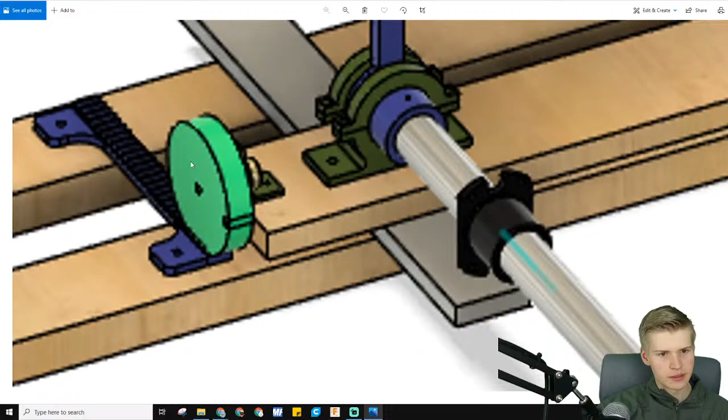You see this right here? This is a potentiometer. We don't like those, apparently. Everyone I talk to says potentiometers are the devil - they're so inaccurate, you should get Hall effect sensors. So I'm thinking about changing back to those, and I think that might be a little more fun.

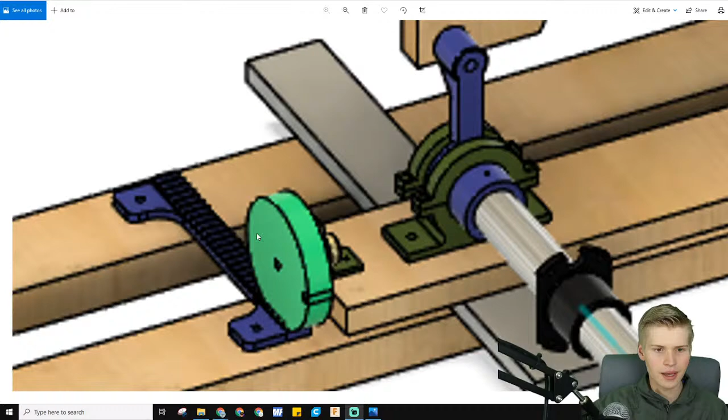Let's hop back to the chat. And here we are. Let's see. So the yokes, as I've shown you, we can hop back to scene 2. Basically I'm going to show you this all in the yoke video, so if you want to be surprised, close your ears - plug your ears, I guess.

The yoke goes forward. I updated this funky rack and pinion thing for a less funky rack and pinion setup. Now I'm just working on strengthening the weak parts and going for that - that's also how I do my workouts, strengthening the weak parts, I don't know. But yeah, that's most of it for the yoke.

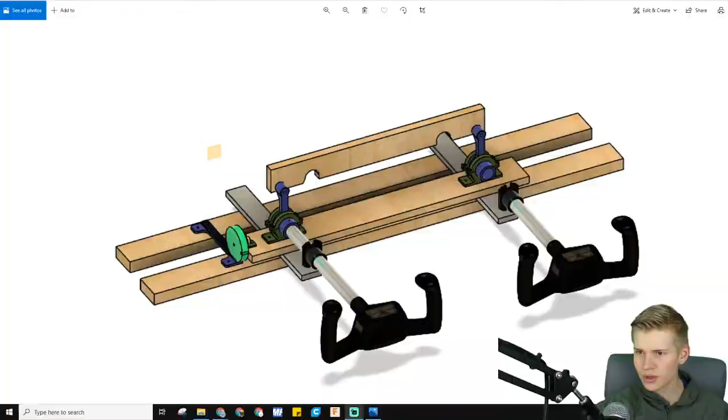I am going to show you some CAD later, or I guess right now. Let's do that - Fusion 360.

Alrighty, so I also do want to bring up the topic this whole video is about. All right, I have Christmas music pulled up. I love Christmas music, let me see.

Uh-oh, it looks like it's frozen. But we'll pretend it's not. Uh-oh, that's not good. All right, how are we doing online? Can you see me? Can you hear me? I was getting so motivational. Darn. But yeah.

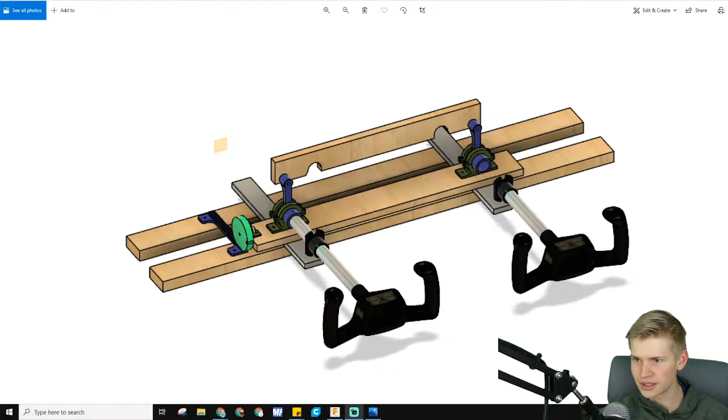All right, we're going to open Fusion 360, which is also known as Confusion 360. Let me, I think I have a thing, CAD, where is it? Boom, boom, it's like this.

All right, we're gonna let Fusion 360 load up, and then I'll share my screen, because that is an important part of computer-aided design. We need a little Christmas right this very minute. Oh, where'd that go, let me bring it back. I'll share my screen in a second. I'm struggling.

Alright, so here is Confusion 360. We're going to be designing today a part of our yoke assembly. It's going into section 2, just under 2. Right now I'm trying to figure out a better way of doing this.

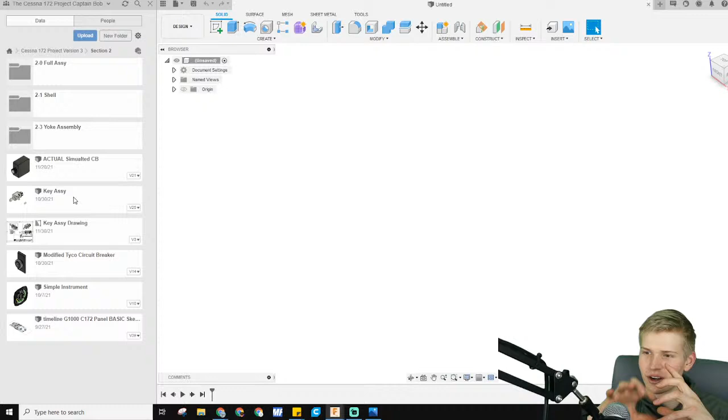Is this what you see? Let me make sure it is. Actually, I can zoom in, that makes it easier for you. I'll just zoom into the place right here and hide the Windows bar.

There we go, CAD man. I won't have holiday cheer unless I have this, so there you go. Yeah, it has to be to the side, otherwise it's not Santa, it's just a grumpy person, right?

Alright, so we are going to start our flaps module. We're going to have two pieces of hardware. One is a servo, I've already modified that in my electronics library. I'll just drag it in real quick.

So we gotta save it before we enter anything. This will be the flaps, let's just go Assy, the shortened version is much easier to type. Maybe I should go to college.

So it's going to be in Section 2. Section 2 is for everything that goes to both simulators. Section 2A is specific to the analog, Section 2G is specific to the G1000, that's how it's divided up. So Section 2, and this isn't a key, this is a flap.

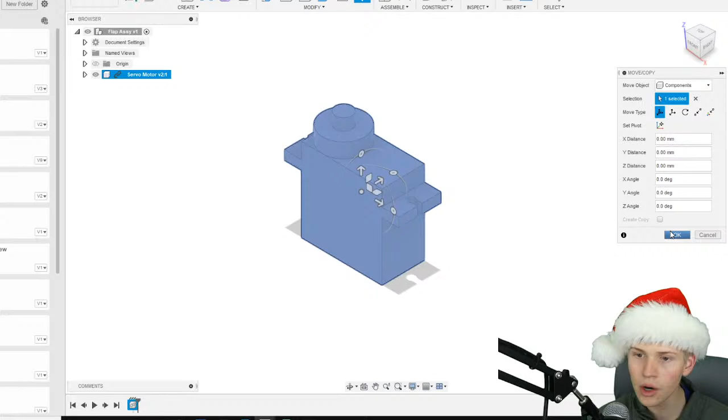I have a ton of electronic models in my library that I've been slowly growing. Here's a servo motor I CAD'd real quick. So I'm going to start out with these components because I know I need them, and they'll just be floating in space until they have a home. I'll hide them, probably. And then we have also something else.

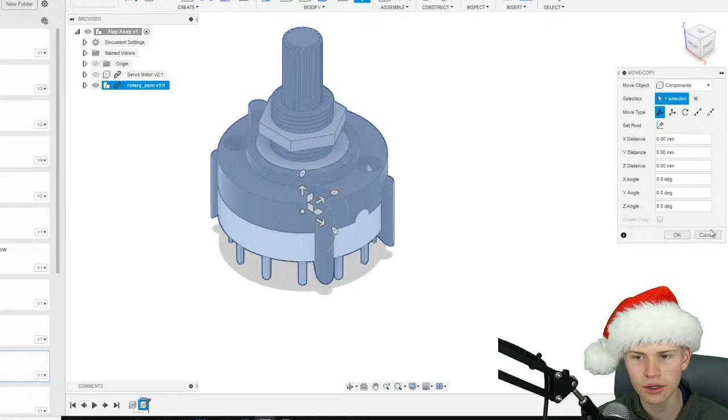Where did it go? We have a rotary thing. All right, so here's our rotary switch. I found this on GrabCAD, and I can use it to reference everything. I'm not actually going to 3D print a switch.

That would be stupid. Actually, it might work. It might be cool to, if I go super deep into everything, to have everything modeled like that. But no, I'm not going to create my own wood from trees I've chopped down. But yeah, here's your holiday cheer, so I'm not clickbaiting you.

Oh, thank you, thank you Javier. I'm really bad at pronouncing names. I hope I got that right.

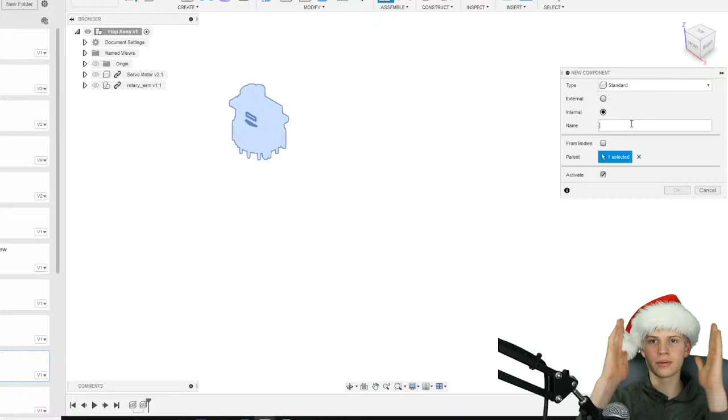I think I should start making my components right now. So this flappy thing is going to have a few components. One of them is going to be a faceplate. One is going to be a left side plate, another a right side plate, another one for the... another one is going to be the servo and the rotary assembly.

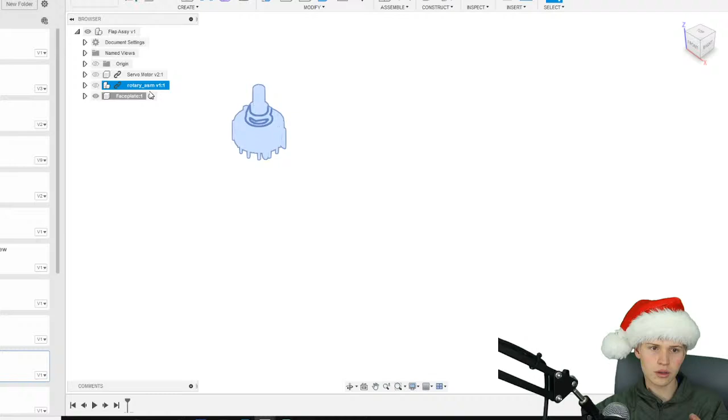So we'll need two more parts. After that, new component, we'll have it... yeah, I gotta have the hierarchy right. But we'll have a, what's it called? Left wall, we'll call it.

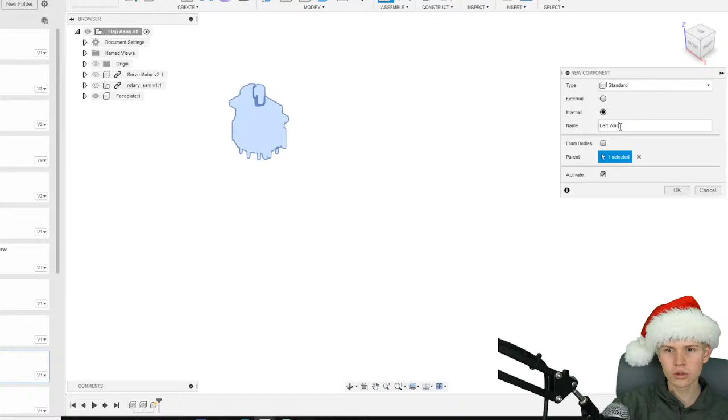I don't know, whenever I'm looking through people's CAD models I'm like, why did they call it a wall? That's dumb. And then I'm like, oh actually they called it that because they ran out of words. I run out of words too, so we're going to call them walls. They're the things that hold the electronics. There's also going to be a servo lever.

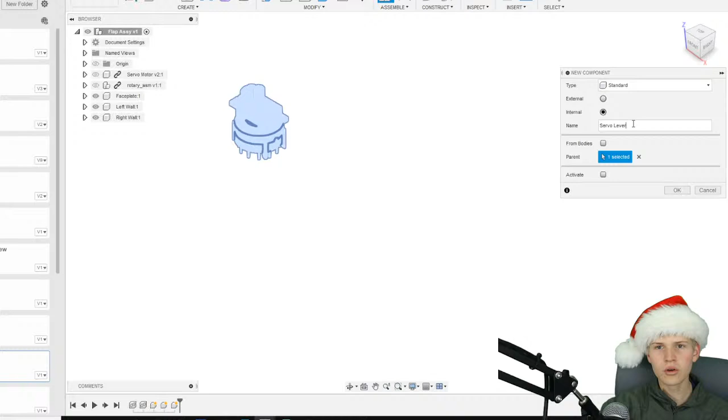Servo lever. And then actually, what might be easy, part of me is like, do I want to laser cut it? Because laser cutting, you buy a sheet, laser cut it real quick, put them together, and it's super accurate depending on your laser cutter, it's cheap, don't have to 3D print it, good DFM, design for manufacturing.

But also, at the same time, if I get a plastic part like this, I can have it as one part instead of three, and if I have one part, you don't have to assemble it. So I'm thinking maybe we have a component whose parent is this, called walls. Wally, yeah, it'll be fun.

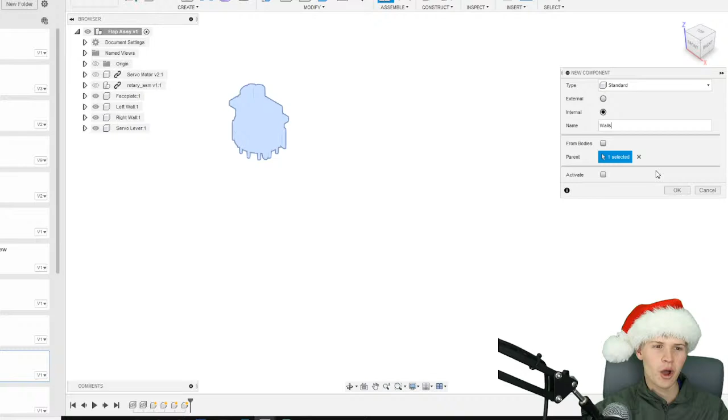We have a component called walls over here. We put the left wall in, the right wall in, and we shake it all about. So basically we have a left wall, a right wall, and a middle wall. The active component is going to have a middle wall too, and those will basically be the spacers.

So I really like allanglen's Cessna 172 flap control. I'm going to design it to my own specifications. I'm very particular about hole spacing and stuff like that, but if we go to its Thingiverse, we can find it.

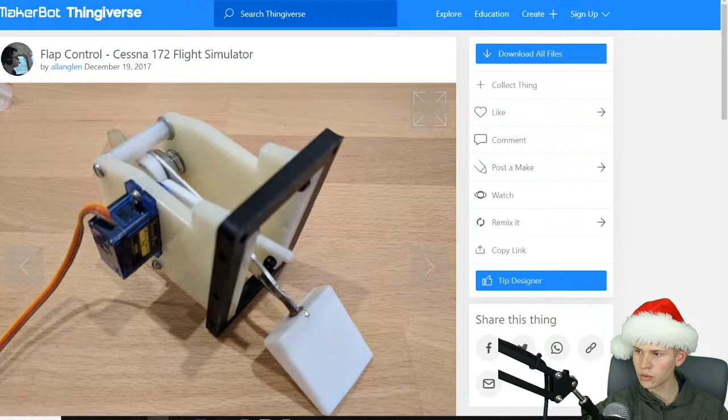Oh, it's like we can find this design. So I'm going to have the servo lever, kind of like he did. He used an actual Cessna 172's control arm right here. I don't want to do that, because then everyone has to buy a Cessna 172 control arm. And if I make everyone do that, we'll run out and the world will collapse upon us. So it's just not a good idea.

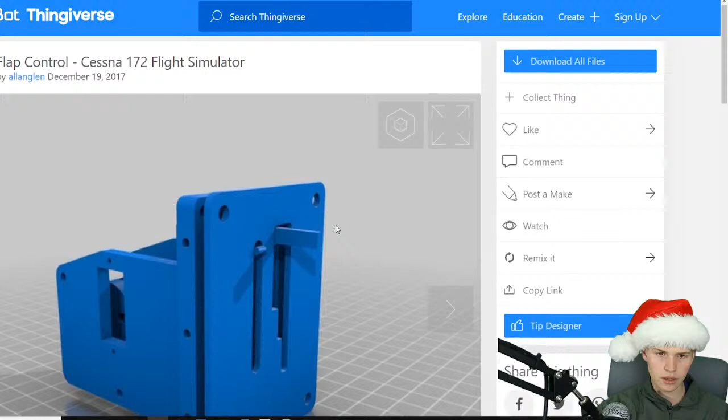I'm thinking I want this. Basically he has a lot of it. It's weird though, because he provided this CAD model with everything sketched out and stuff, but then it's not actually all in the file, so it's a little weird. You'd have to cut it up. But basically, I want to improve upon the arm mechanism and make it so it's primarily 3D printed instead of...

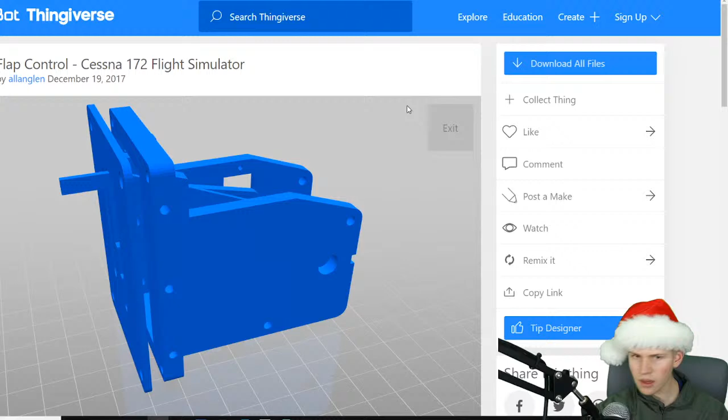It does show the lever. Let me see, that's strange. It must be on the site. Let me go get that. Can you properly? Huh, let me see.

So it's possible I'll use this one. I do like designing stuff, like it's a challenge for me to think about how to design it. And I do want to have it all one part right here, so you can just print one part, no supports. And then out of the gate, it's like a 2-part assembly.

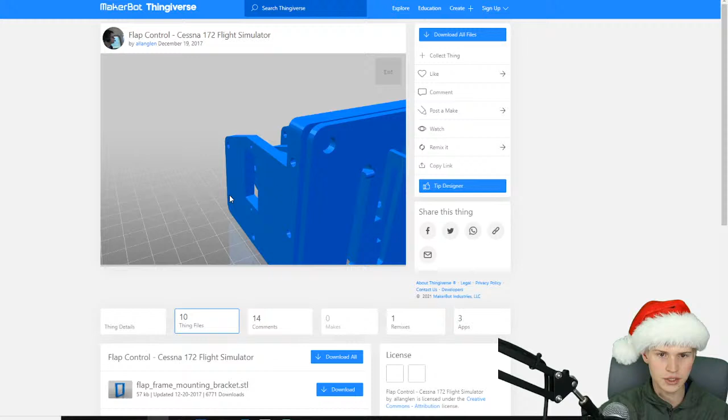So it's easy, or I could have a 3-part assembly, so it's easy to ship, with walls and spacers and stuff. I definitely want to see how I can do that. I do want it to be flatter though, it's a little tricky. I like this design a lot. I just like pushing the boundaries a little, even if it doesn't accomplish anything.

Let's see, he does show the 3D printed lever on his site. I just printed it. I'm gonna go back to his site. allanglen, here we go. So let's go, I think it's under avionics stack. Alrighty, so it looks like he has this part, this part, this part, the lever mount.

Oh, it's glitching out again, my apologies. Huh, okay, so that's really weird. So I know he has this part. I couldn't see the actual lever that the handle goes onto anywhere. So I'm gonna look, because there are 2 knobs. One of them's a lever, and one of them's something else.

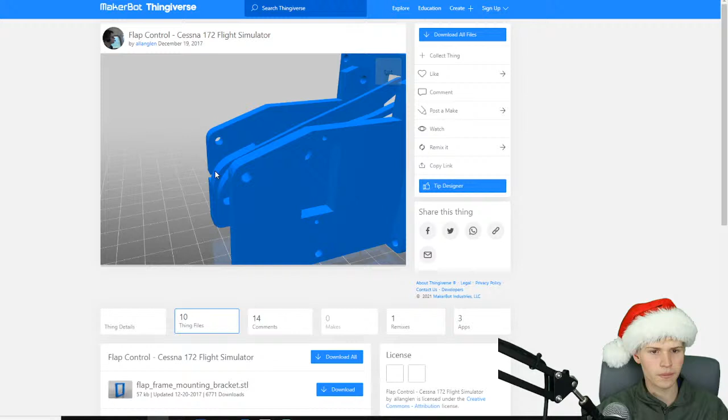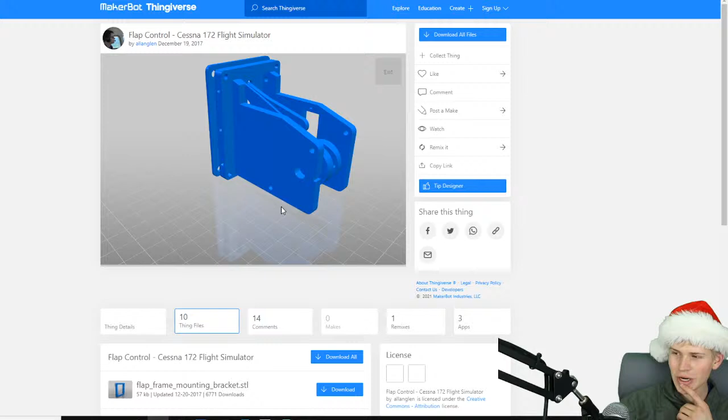I'm gonna see 6 pieces. 1, 2, 3, 4, 5, 6. Alright, yeah it's weird. It looks like it's in this FreeCAD file. So I think I could just basically open up the FreeCAD file and print it from there. But this is one of the designs I've been looking at. I'm gonna try to make back up to it, I can't find it anywhere.

This one isn't the right one. Yeah. Oh, here it is, there's a mount for it or something. Pointer and lever, pointer and lever. I'll just control-F it. Never mind, alright, so I can't find it.

So I'm basically going to - I could take this design and go from there. I could also make my own, and I think I like to make my own a lot, it's just fun to build them myself. So what I did was I have a folder in my Cessna 172 simulator folder. I'm gonna probably end up putting this on GitHub someday. Where did it go?

Section 2, flaps, I have so many images. So I have this whole folder right here. I go on eBay basically, and I find a flaps panel, and then I basically replicate it. So there are a bunch of different styles of flap panels, short ones, thin ones, fat ones. Here's the lever assembly that we're talking about.

I couldn't find it, I'm probably looking in the wrong places. Here's the handle, some good reference images. I'm gonna throw that one - oh, we'll rename it something, put a 1 at the end of it, and then it's different. So we have all of these handle images from eBay.

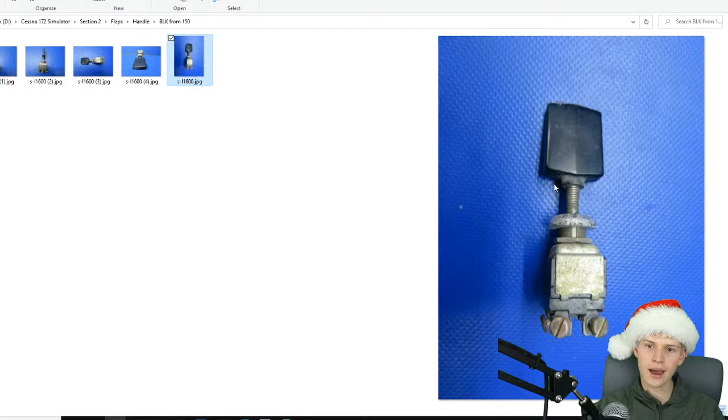And so I basically take these and go from there and challenge my brain, because really, just like when you're learning CAD, if you're wanting to learn more CAD, you can copy people's designs and put your own spunk on them. Like, I really want to have this root right here, this extrusion. I don't think his simulator had it on his flap handle. Where is it? Exit. His flap handle right here doesn't have that little thing. I think it might be a 3D printing, make-it-easier thing, but I think I just want to print it with support.

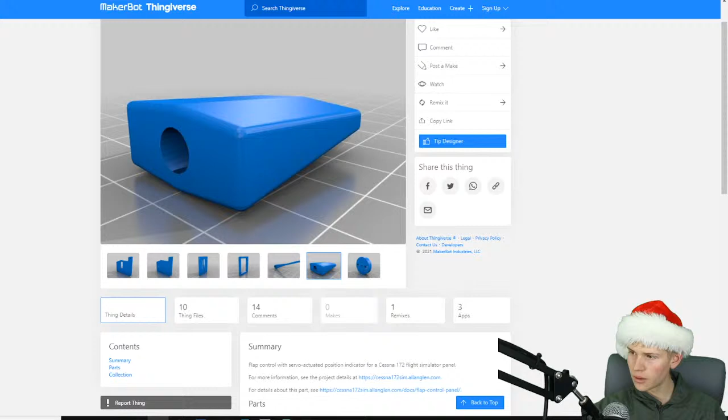Right, so yeah, here's what we are doing. This is someone else's thing. I want to kind of take inspiration from it, make my own, and I'm gonna just basically start from scratch. I want it to be as few parts as possible, so that'll be interesting. Let's see.

I want to see. Oh, is there humming in the background? We'll figure it out.

Alright, oh that's too bad, your joystick broke. Sad to see it here.

Alright, I'm gonna just read through the comments real quickly. Interesting, I'll have to look harder for it.

Can you properly laser engrave PLA? Probably not very much. I'm gonna look into some thin sheets of ABS. Not ABS, acrylic. I just printed the whole assembly, 6 pieces to it.

Back up to it, point and lever. Alright, I'll look harder later. I tried printing this a while ago, but I had the same problem.

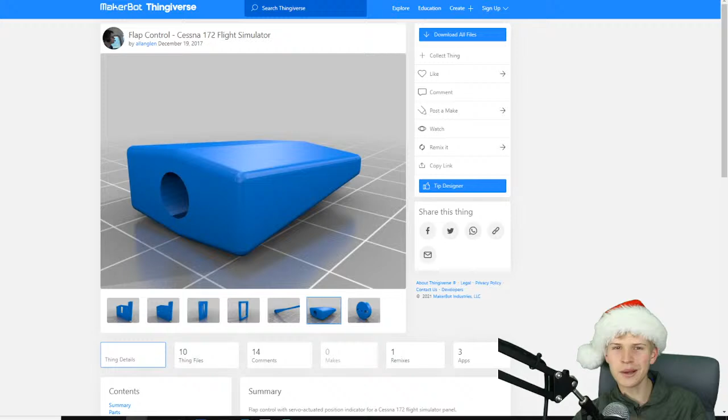Position indicator. That's so weird. This is the flap position indicator, but I don't have the actual real one. So there's also this lever mount, but I don't have this metal piece, so I'd have to probably buy one, I think. Also, his design uses a potentiometer.

These are notoriously hard for me to explain to people how to connect them. They're probably pretty easy, but I just haven't. The easiest way to do it is to connect it to a joystick and then coordinate the joystick, like find a way to calibrate the joystick to the flap axes and make sure everything is good to go.

I'm going to use a 4-position switch. That might be easier. I know in these, I feel like it's more of a smooth movement instead of a definite pop. So the detents in the switch will kind of maybe throw it off. So I might try to make a design with both a potentiometer, a flap, and a rotary switch.

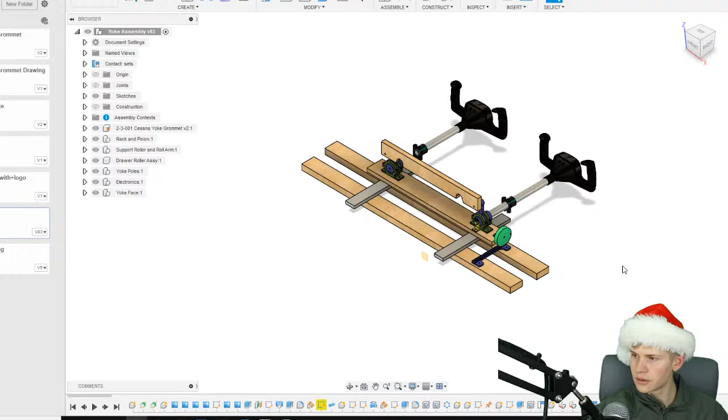I'm gonna look one more time because I really don't see it. Maybe this is taking too much time. Yeah, I'll look later. But here's my yoke assembly.

We don't need that right now. We want this flaps assembly. Very nice, so it looks like he does have it up there. I just skimmed it and missed it. I've missed it my whole life.

Alright, so what I'm thinking is we could make a left wall, a right wall, and a middle wall. And if you want to have it laser engraved, you'd just have a left wall and a right wall. And then you'd use spacers to go between the two. So that is one way of doing it.

I might also instead kind of reference geometry from some of this stuff and say we have the left wall and the right wall, and then from there we have three parts. Just basically have one part that's designed for 3D printing, one part that's designed for laser engraving, so that it keeps both sides of people happy. So yeah.

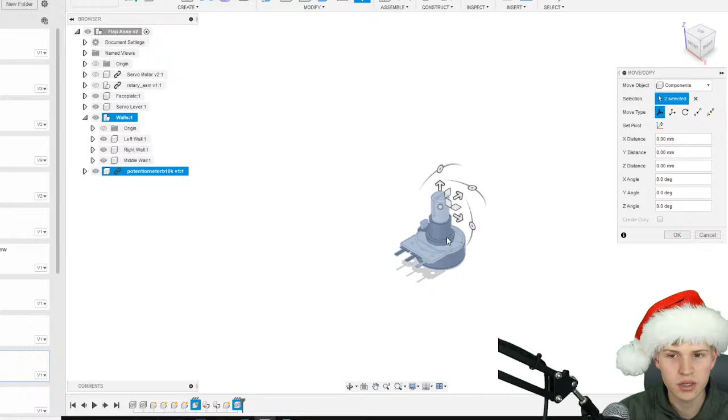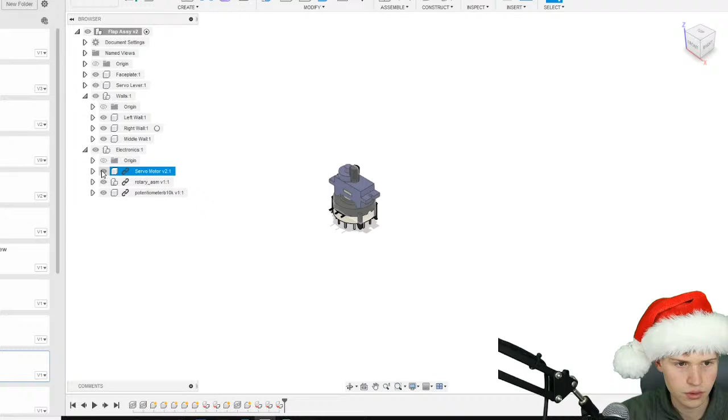So we also have a potentiometer. I'll make an assembly, kind of like I did with the walls, hopefully at the right scale. I'm going to make a new component called electronics, so I can put all this stuff in there without cluttering up my file tree. The nice thing is we can turn them all off and on at once, like an avionics master switch.

So I'm considering FSUIPC. MobiFlight is a little trickier, I have to do some fancy stuff. And welcome, Noah, welcome to the stream, glad you could make it. It'll be fun to see when it's done.

Detentless encoder? I've never heard of that. Is it just an endless encoder? Huh.

Strange. Also, why did my thing turn to Bing? No one likes Bing, just kidding. But I like Google Chrome because it shows you videos usually. That's just a side tangent.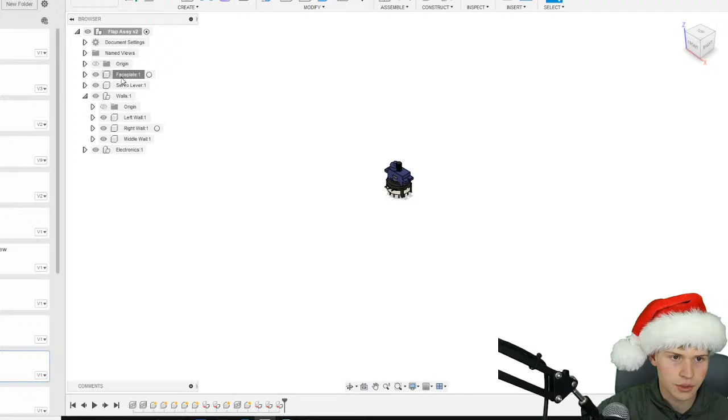So we have the electronics we're going to design around. We're going to start by doing the faceplate. The faceplate is the keystone of this design - if I get the faceplate wrong, it'll be a little tricky.

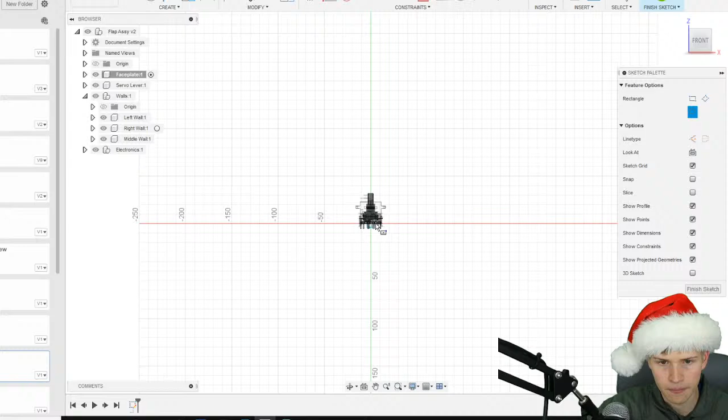So now we have a sketch. We want the front to be right here, and we're going to make a centered rectangle. I'm going to turn off the electronics, and for now I'll dimension it later.

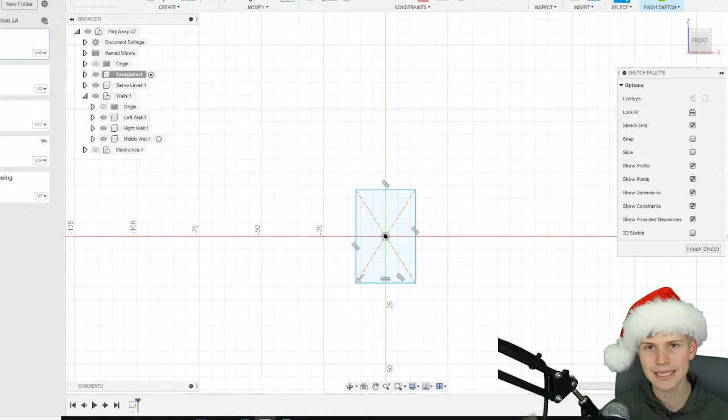Over here, we're going to pull in something. So I have my old files - those are the good days - but here's the new files. Section 2A is my work so far, so I'm going to pull in the panel. Section 2A and Section 2B will be the same, but I've only modeled Section 2A.

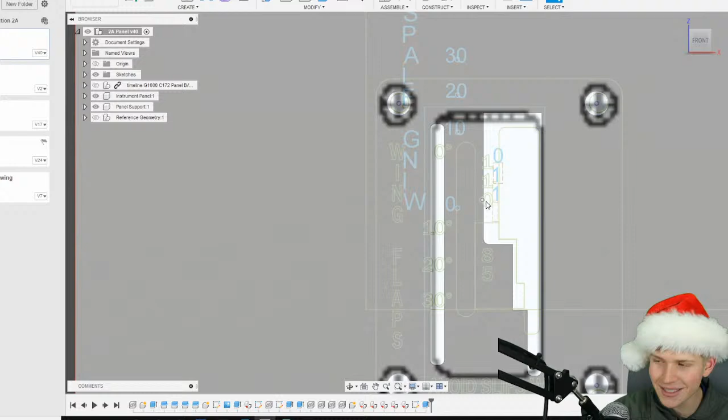I also wanted to see how he did it, so a lot of reverse engineering is used to forward engineer. I'm going to do all of my designs in Inkscape - I don't have Illustrator, can't do it there. But he basically just made a box with patterned holes. His didn't line up enough for my images.

So what I did after that was have a bunch of reference images just to double check - that's what all of these reference images are. I can pull them up and we can make them work.

One of my questions is there are three types of flaps, and they each have different speeds, so I need to make sure it corresponds to my simulator. I might want to make the speeds parametric, so I can change the words - I can't have an image of text, I have to have the text raw. That's another challenge. Here's what it looks like blank, and then these decals are applied - they're either decals or screen printing, I'm not quite sure.

So here's basically how it functions. There are also ones without faceplates at all. This one, for example - don't know what part of a Cessna it is - but instead of having like, I'll make a drawing.

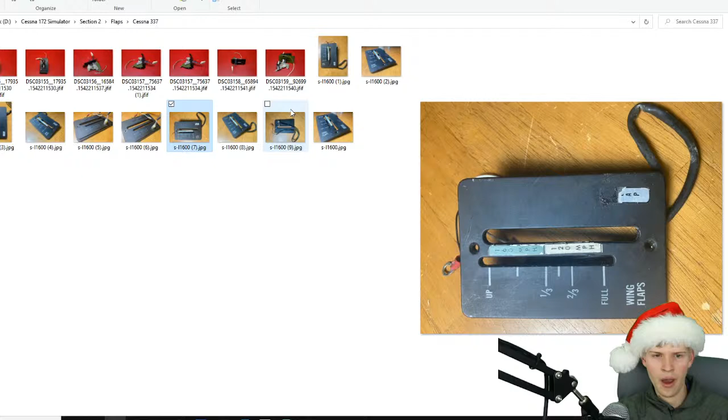Anything else? The Cessna 337 had a pretty ugly one. It looks like they photocopied it almost, which would be good for me because it'd be straight on, but it isn't. I also like how their flaps are in fractions, that's just funny. Here's the mechanism in their airplane. Not really sure how it works, to be honest.

Maybe I do. I think, actually, if it might be, there are two micro switches. I could do this in the real world with some logic programming. This is the actual flap mechanism, and this is why these designs always take more than exactly 1 hour. If I have a click one way and a click the other way, you can tell based on the amount of things it's clicking which position it's in. So if it's clicking the bottom one, I guess.

This is insane, what am I doing? I guess it's actually, let me check something. So up, down. I don't know how this mechanism works. I've gotta reverse engineer it.

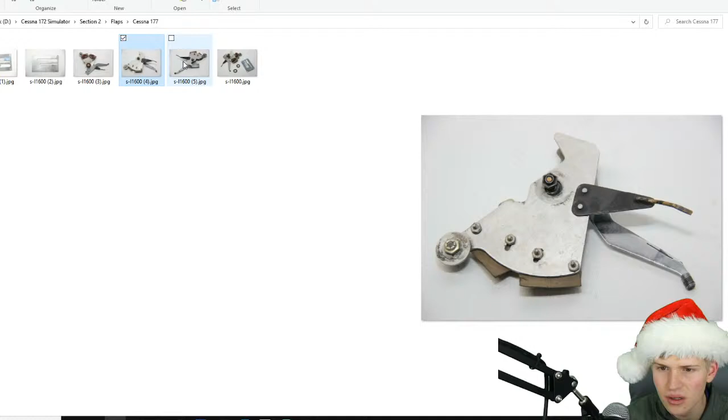But I think what happens is if this hits one of the micro switches, it knows it's in one position. If it hits none of them, it's in one position. If it hits one of them, it's in this position. And maybe even if it hits both of them, it's in one position. So it's like something, I don't know. This is strange. If anyone's a mechanic or something and knows how this works, I'd love to see how it works, or even if you take apart Cessnas for fun. I have no clue how that works, and I would love to find out.

It reminds me of the gear mechanisms that have the micro switches for up and down. I'd have to think about this because I have tons of those micro switches. You just snap some in real quick.

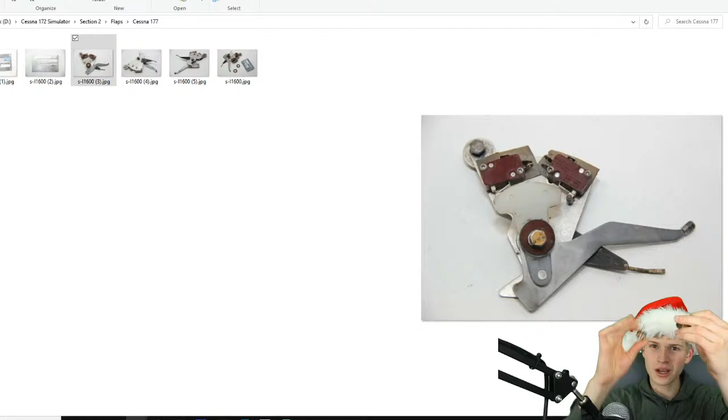Strange stuff. I guess a potentiometer would be the best free rotating, detentless switch. A rotary encoder, I was thinking about that, but it would be super tricky because you would basically have it say go down one flap, go down one flap, go down one flap, go down one flap. But the flap down commands would be so close to each other that it really wouldn't make sense with a rotary encoder. So I'm stuck with potentiometer and rotary switch for now, unless I can make my own rotary switch out of micro switches. But I think those are the main options right now.

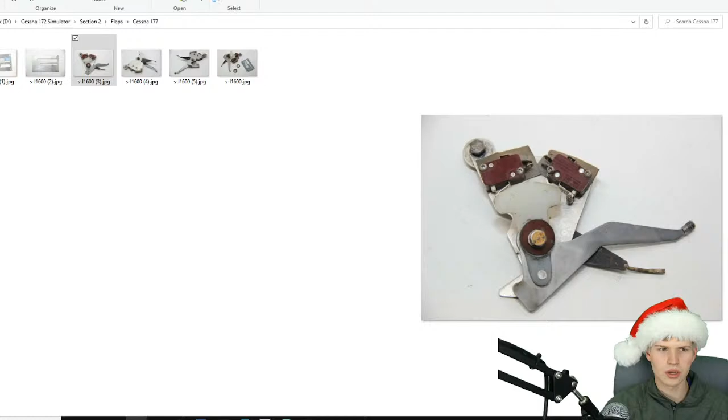How many positions does the flaps indicator have? I believe it has 4. Yeah, 1, 2, 3, 4. Used to have 40 degrees of flaps, which would have made it perfect for my 5-position switches, but those are only in pretty old 150s. Darn it.

Four positions. All right, so okay, yeah, since there are 2 bits from 2 micro switches. All right, let's go back to that image. I want to see if I can decipher it now. You've given me new powers. So it looks like there is a...

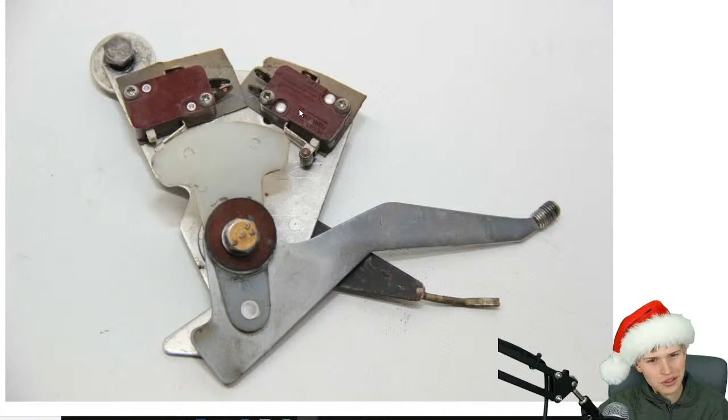I don't know how they both connect at the same time. I think that's the middle position. But it looks like this hammer thing: when it's all the way down, it hits one switch, so flaps down. When it's one from all the way down, it hits one, but not the top - it hits this micro switch, but not this micro switch. When it's here, it hits the top one but not the bottom one. And then when it's at the top, it hits none of them.

Yeah, I think that would be a cool design. So that would be a lot of possibilities. Let's see, strange. That blew my mind, thank you so much, Jay.

I might have to design one like this in the future, like after I do my simple rotary mechanism, because this is really cool. You can tell when these are on and off, sorry about the microphone, because they have a normally open and a normally closed, so it does give both open and closed information. So you could easily take that into MobiFlight and write a really ugly piece of configuration that says when the top switch is on but the bottom one isn't, do this; when the top switch is on and the bottom one is too, do this; when the top one isn't and the bottom is, like that. So that would be pretty good.

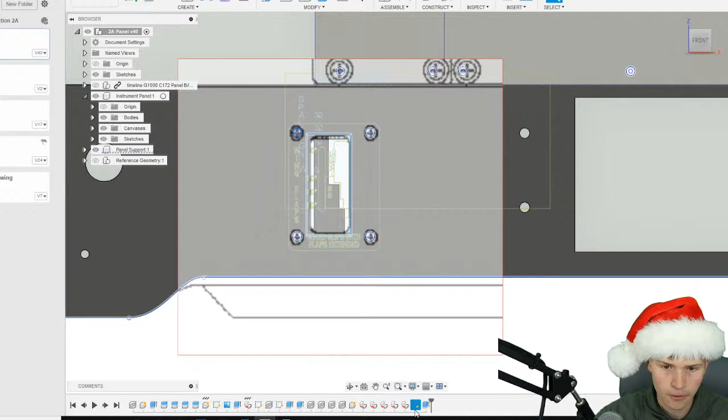If we go into this sketch, basically what we're going to do is insert a ton of canvases from my computer. Wish you could just drag them down - that would be fun, but what's the point of that? Right now I just got to choose between the flaps.

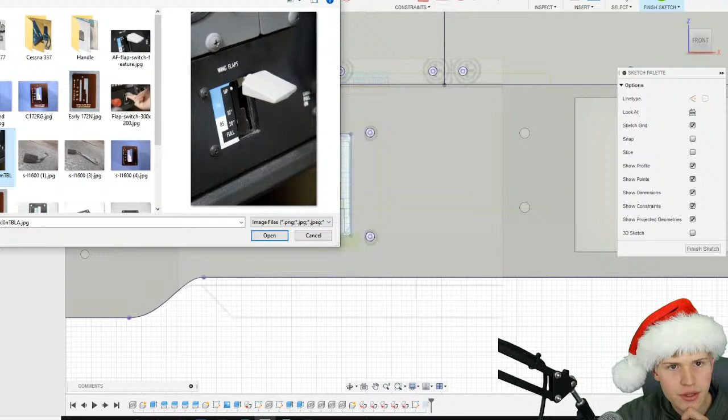This panel specifically has the 4 holes, so we're going to match it to one with 4 holes. I think that's a kind of good plan. Let's match it over here, and we're basically going to just try to line up the holes, and theoretically they would all line up. Bringing forward the opacity.

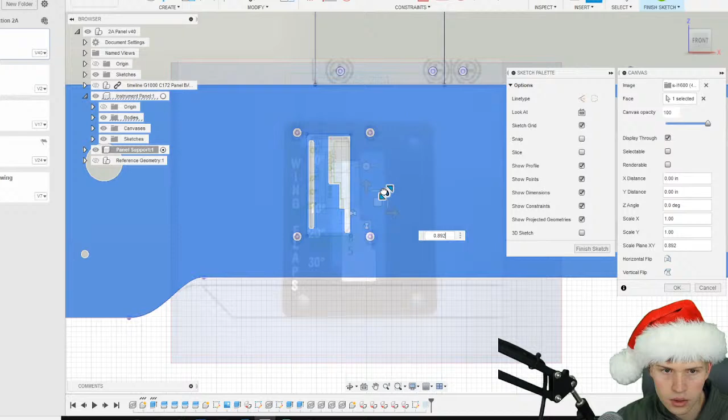So here's one of the holes. Scale it down. Maybe I should try to center it and then try to line it up. But we have the holes over here. I'm going to turn off some of the other canvases. Is this the one I just added?

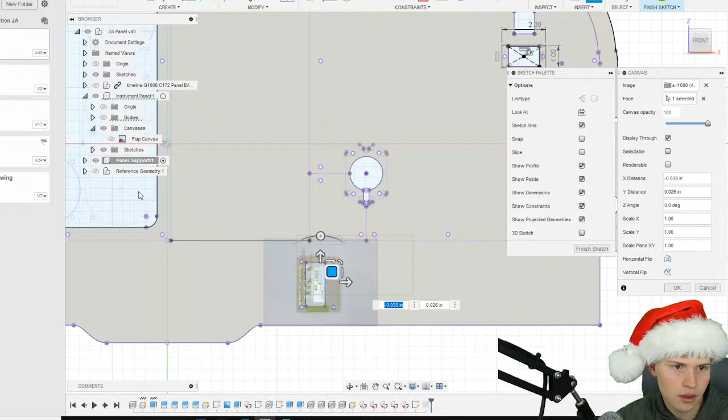No, we're good there. Turn off the bodies too, and they should turn back on later. Turn off this - oh, that's awkward. Just turn off the bodies. So here we're just looking at the sketch.

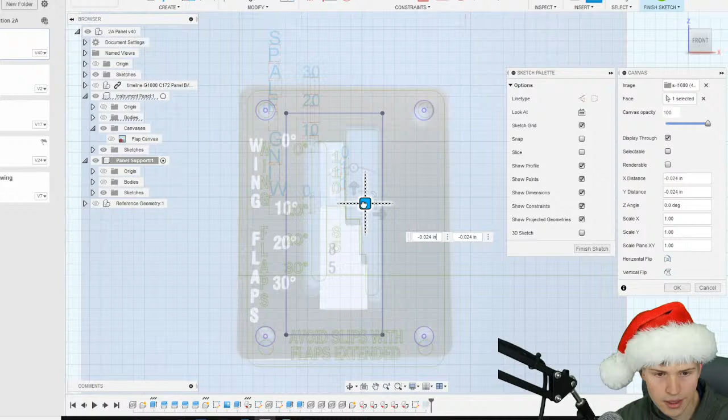And the holes line up pretty okay. This actually doesn't happen all the time - you can see these bottom holes right here don't necessarily line up with the ones shown in the panel. I might try a more top-down image, but this just gives you a rough estimate of where everything is.

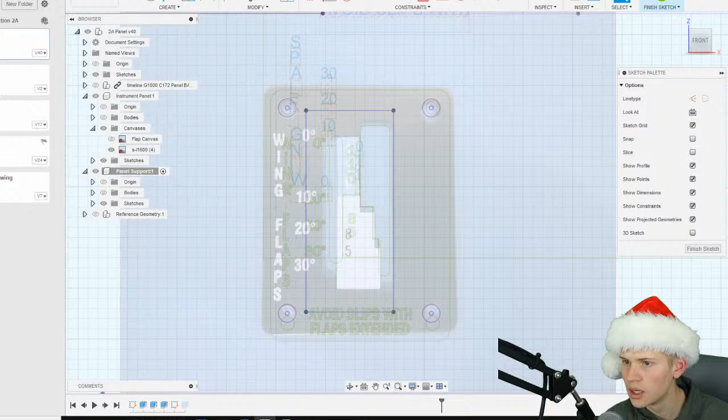So I'm going to press enter. This is now a canvas. Congratulations. I don't know why my timeline is all the way over here - that's a bug, shouldn't do that. I could try some of the...

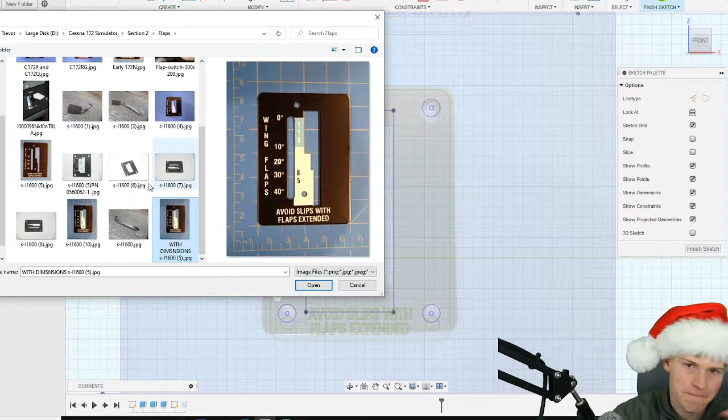I had a surprisingly low amount of these 4-hole flaps right here. I'm gonna insert another one - same time, same bat channel. This one would be super nice because they gave me this centimeter grid, which is like, wow, no one does that. But we're gonna go with this one.

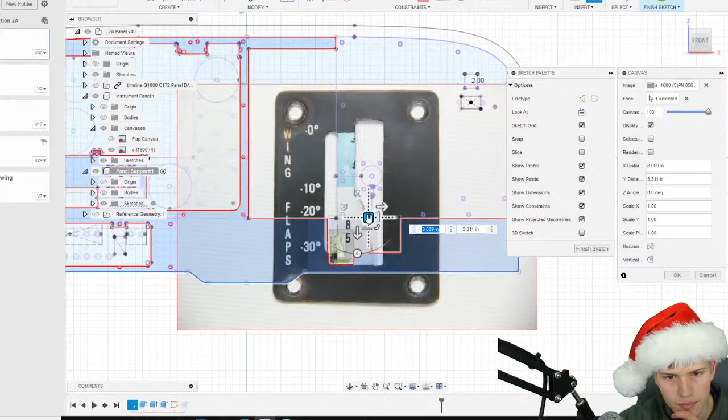Put it on this axis. Ooh, it's a little jumbo. We're gonna flip it around, and eventually, if you flip it enough, it gets flipped the right way. I could also rotate it, but it's fun to apply transformations. Scaling it down, scaling it down.

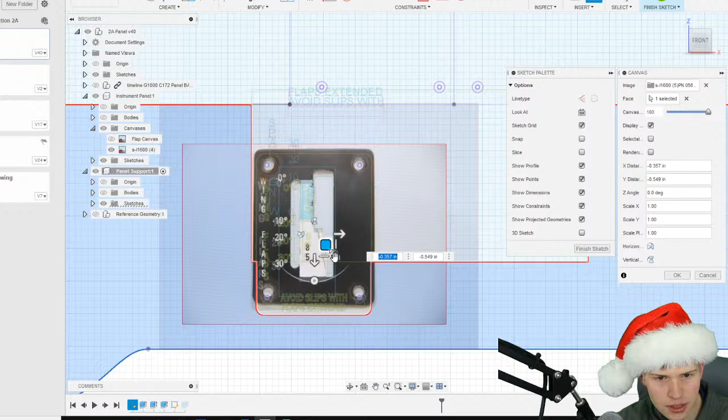Also, this one, if we do this one, looks like it is too fat. So it looks like it's for a different Cessna than... Oh, actually it fits up. It actually fits, so we can let this one pass if it wants.

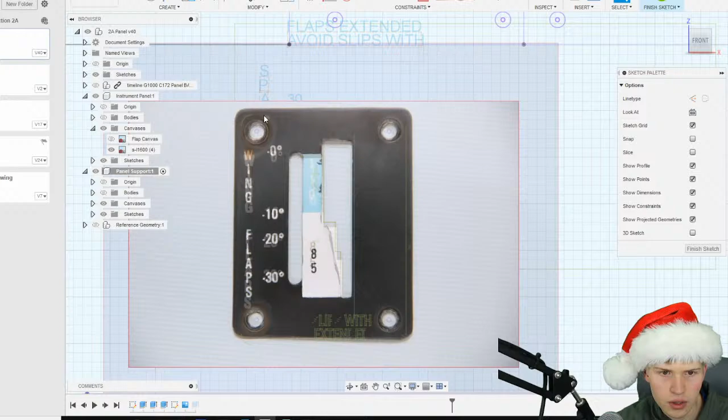Its whole position is actually perfect. I think the other one was just too tall. Also, make sure to never body shame your switches - they'll be very angry. So yeah.

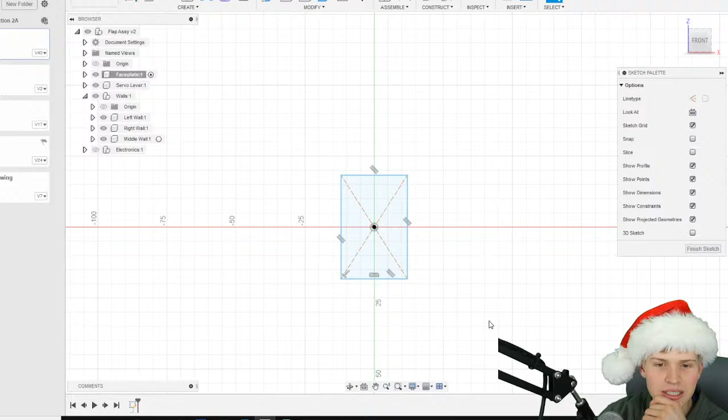So this is a good canvas. What I have done in the past is made a copy of this, shifted it over, made a duplicate of this, and then made it into a new design, imported that new tiny little sketch design into it. I'm gonna see if I can derive - I'm gonna actually finish this sketch, make a new sketch so I can just derive the sketch.

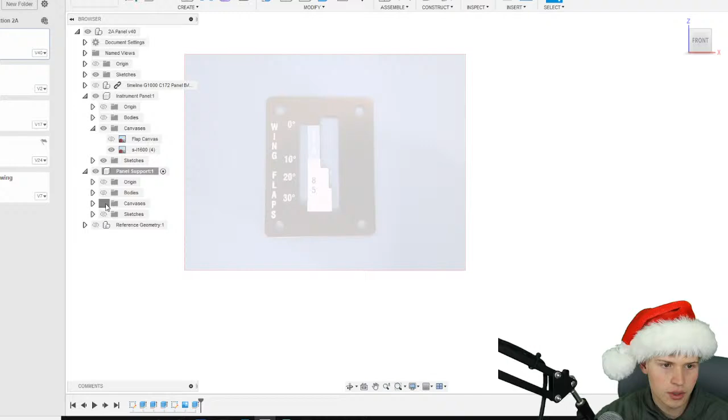I'm in the panel support over here. I'm going to hide the stuff I hate - no hard feelings. We know it's all up to scale, or should be. What's this one?

So this is the one we want. We want a sketch on the same plane as this sketch over here. This is a new sketch. We're going to hide the sketches. Oh, that was dumb. We have a sketch right here.

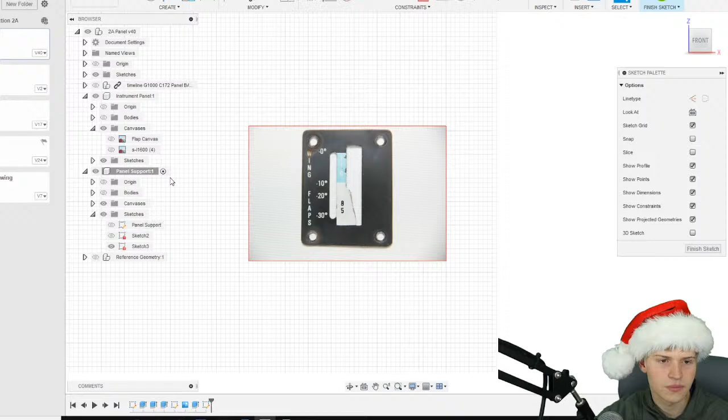I did this in the wrong place. One sec, I'll just do it in the wrong place and move it. It's not a good best practice, but we're going to shift it anyways, so it isn't mission critical. But we have this over here.

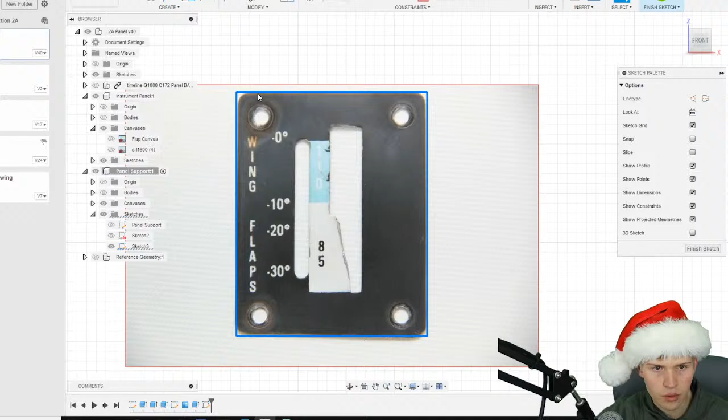We're going to fillet the edges. Oops, got ahead of myself, put the cart before the horse. Then the horse got spooked and bucked me off. Not an offset, a fillet. So we're gonna fillet these edges right here.

I haven't read the chat in a while. You're probably like, we can't hear you. Also, your background is on fire. And I'm like...

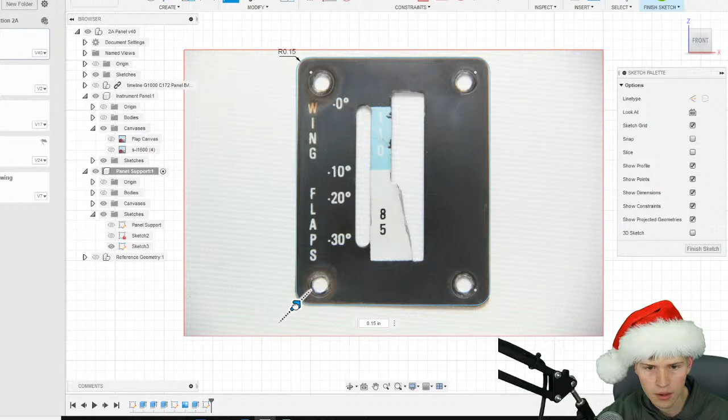Let's see, so it looks like a radius of 0.15 inches is more or less good. But is it good, or is it perfect?

Yeah, and I'll have to shift to millimeters. This should be square, it's just had its better days. So we'll fix that. So basically, I'm going to make a rectangle right here.

Trim it, and I'll use the trim tool right... actually, gotta make another rectangle. Now I'll just make lines.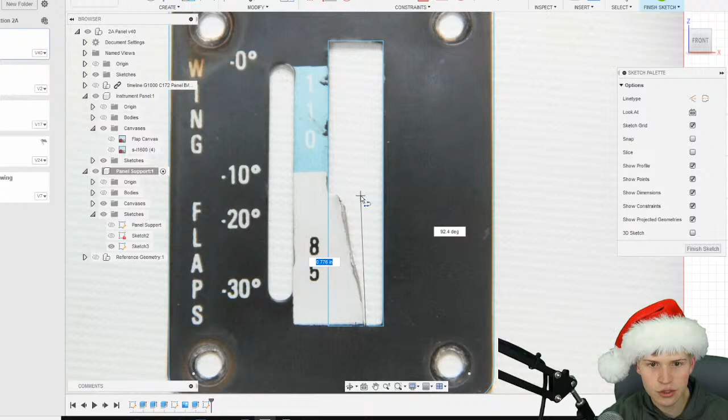It's a lot of super crazy decision making that's hard to walk through, but I just made this part because if you look at new ones, there's a brand spanking new one over here. It's all square, and then you use them, and over time it wears down like this.

So I might even make one that's weathered, just sand that off to have an old Cessna 172 type of feel. Part of me really wants to make a weathered simulator like that.

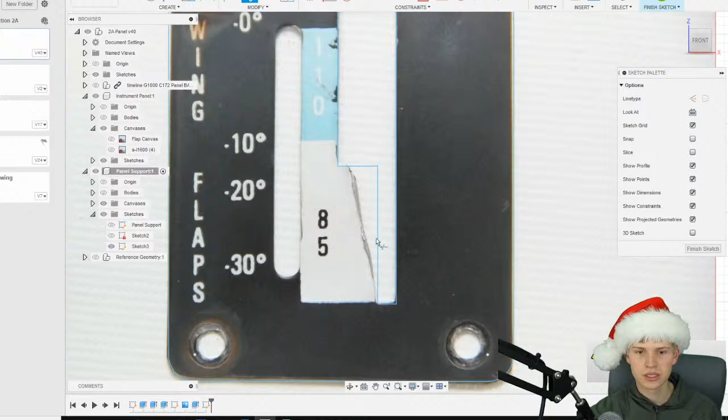Oh, I just trimmed that off instead of filleting it. But this is all squared, and we're going to make a slot down here. So the slot command is right here.

This is Fusion 360, by the way. That's what I'm designing everything in. Its nickname is Confusion360 because it takes a while to learn.

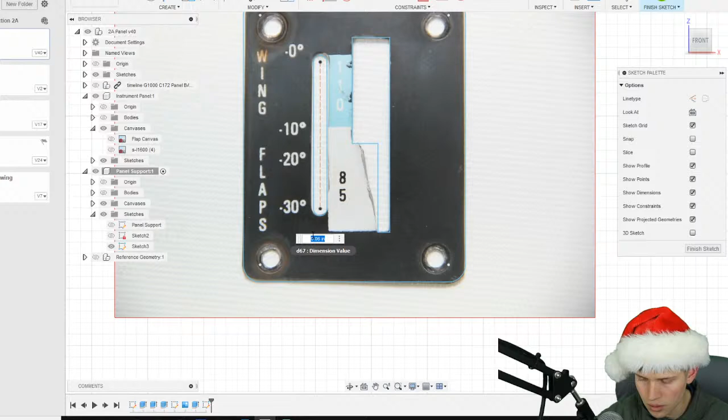0.06, let's say, maybe more... 0.075 inches, I think that's about right.

And then as for height, I really want to dimension the height from here to here, or from there to there. 1.25, let's see how that looks. 1.2.

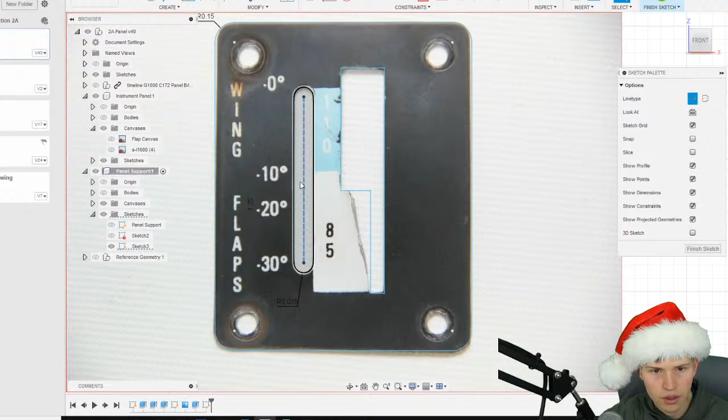That looks about right. The Cessna was designed in inches, so it's usually pretty inches-friendly, kind of. All right.

We have these circles that must be dimensioned. We're actually going to take that geometry later from the panel itself. Right now I just want to extrude it and show you what it'll look like.

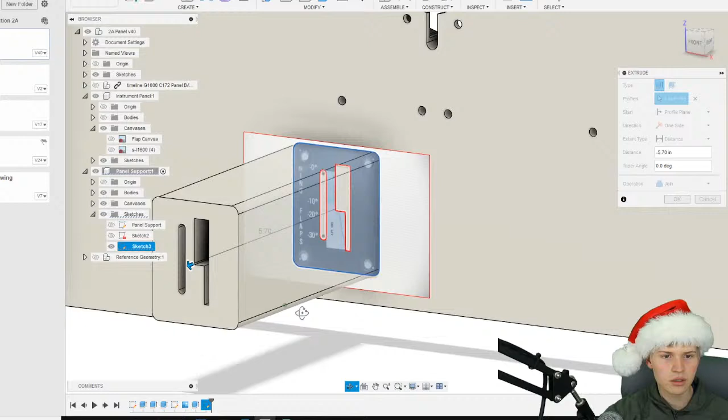Turn on the bodies, and once we extrude that, it'll look like this, although not as thick. It'll probably protrude like 3 millimeters. So it would be like this on the panel.

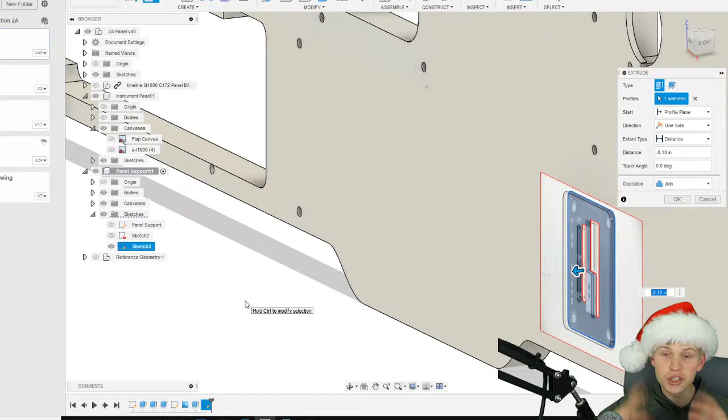So this is what we created today. I'm going to work later on this, probably a lot more off camera, but I just wanted to show you how I go from a drawing, an image—52 if you count them—this is how I go from an image, choose the best one. I even go through the maintenance handbooks, find sketches, and try to find which one is the best.